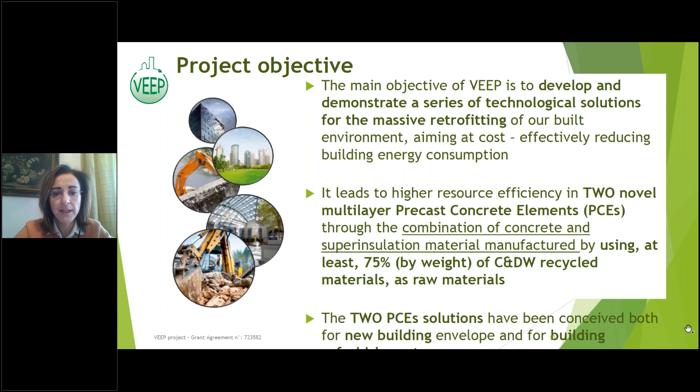The VEEP concept follows the circular value chain for construction and demolition waste recovery and exploitation. At the beginning, we developed novel technologies for treating CDW. Then novel materials were developed, in particular novel concrete formulations for both normal weight and lightweight concrete, and new aerogel formulations. With those materials, novel products, namely two precast concrete elements, were developed for new and refurbished buildings.

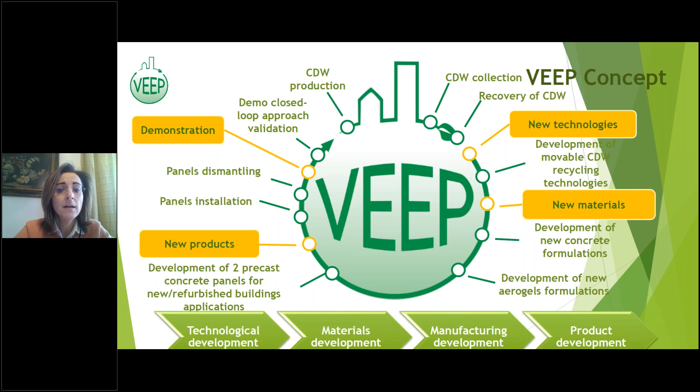The panels were then used for building two different types of mock-ups, installed in two different climate areas in Spain and the Netherlands, to test the behavior of the panels under different climate conditions. A full LCA and LCC approach was adopted to assess the environmental impact of the different PCs. Panel dismantling enabled us to assess the performance of the materials once the PCs had been recycled again.

Now I will go through the details of the novel technologies developed. At the beginning of the project, we designed and developed two systems, the ADR and the HAS, which are capable of treating the coarse and fine fraction of recycled concrete aggregate. Adopting these two technologies, we were able to achieve high quality coarse and fine aggregates.

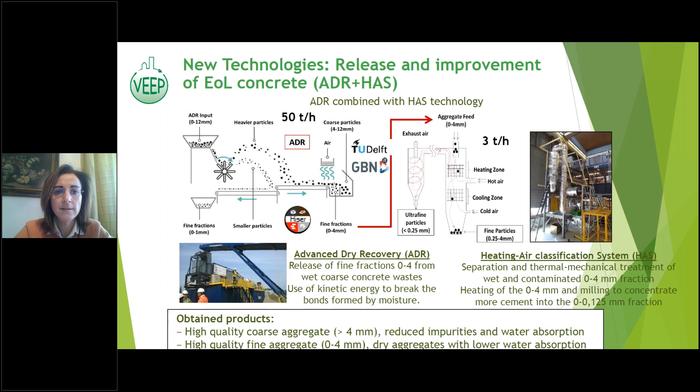In terms of technologies, we also developed a pilot plant with a capacity of 100 liters per day for producing a green aerogel. The green aerogel is characterized by very low thermal conductivity and hydrophobic properties, but with a cost reduction of more than 40% compared to the state-of-the-art aerogel.

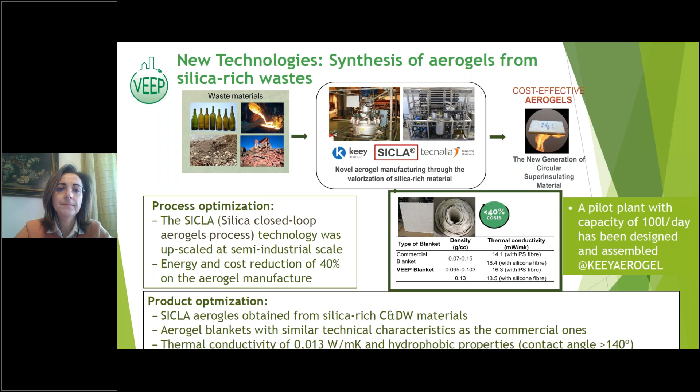Novel materials were also developed, in particular eco-cement and eco-concrete. The eco-cement was produced with 5% of ultra-fine recycled particles from concrete waste, and new eco-concretes, normal weight and lightweight, were produced with more than 75% by weight of recycled material. These materials were characterized by very good properties in terms of mechanical properties, thermal properties, and durability.

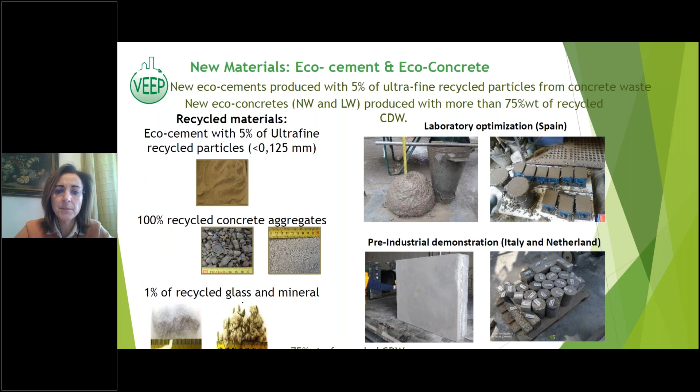The materials were then used for producing the two types of PCs mentioned before, and for the construction of the mock-ups, which are installed in Acciona Demopark in Spain and GBN facilities in the Netherlands, and which are under monitoring.

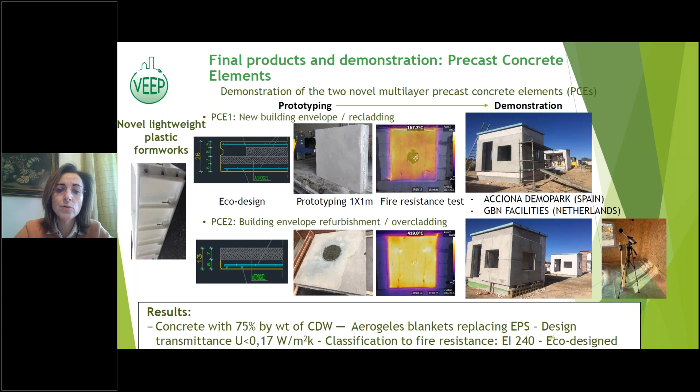It's worth underlining that novel lightweight plastic formworks have also been designed and manufactured in the framework of VEEP, in order to reduce the time for casting the panels.

Finally, we can conclude that even though there are technical barriers to incorporating the finest fraction of recycled concrete in novel concrete, the development of the integrated ADR and HAS movable technology system has demonstrated improvement in the mechanical properties of the cement obtained, which can help overcome such barriers.

Moreover, the positive results about the addition of CDW aggregates, both coarse and fine, can result in better concrete performance. This suggested that we propose an adaptation of existing standards, as mentioned, to allow higher percentages for the use of recycled concrete aggregates in current building practice.

Also, the eco-design of the PCEs can foster their commercialization in the future.

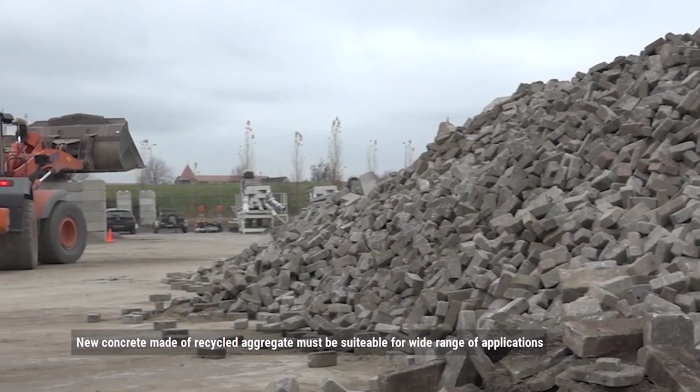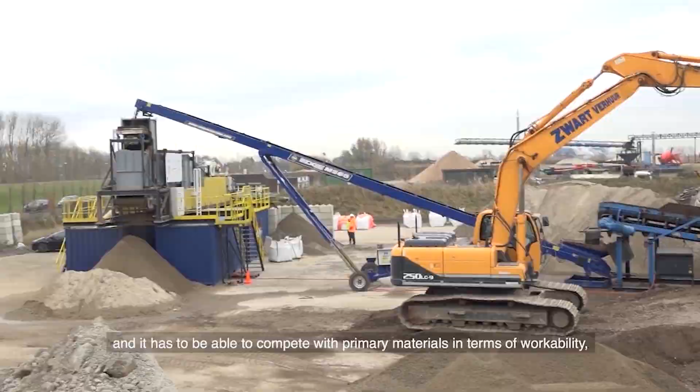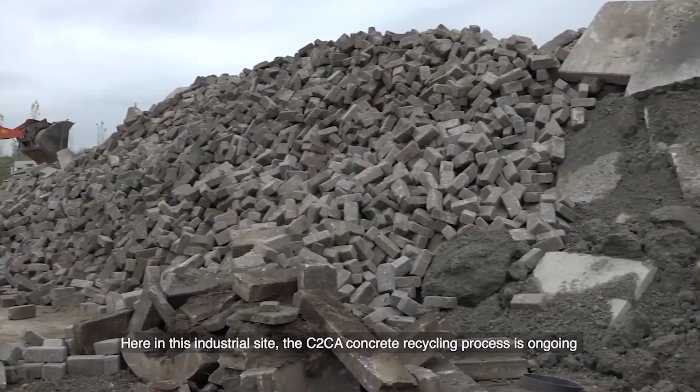New concrete made of recycled aggregate must be suitable for a wide range of applications, and it has to be able to compete with primary materials in terms of workability, compressive strength, and durability. To satisfy these requirements, it is crucial to reduce the amount of fines and contaminants mixed with recycled aggregate. Here in this industrial site, the C2CA concrete recycling process is ongoing to create high-quality recycled aggregate out of high-volume end-of-life concrete streams.

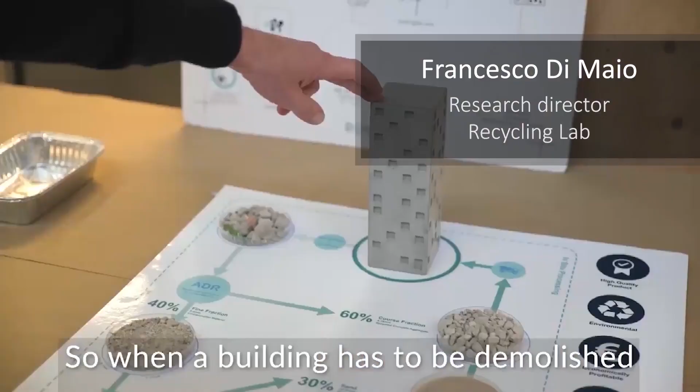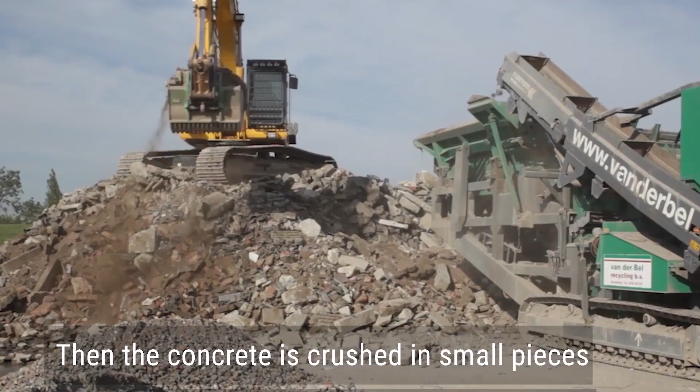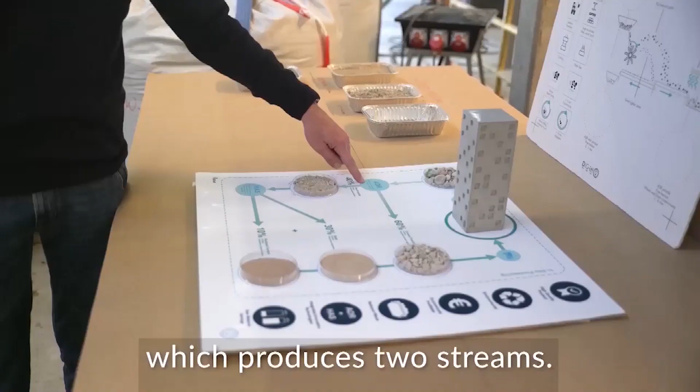So when a building has to be demolished, it is selectively dismantled first, meaning that all materials which can be recycled, such as concrete, wood, metals, and gypsum, are separately collected. Then the concrete is crushed into small pieces and fed to the ADR, a mechanical innovative separation technology which produces two streams: the coarse fraction and the fine fraction.

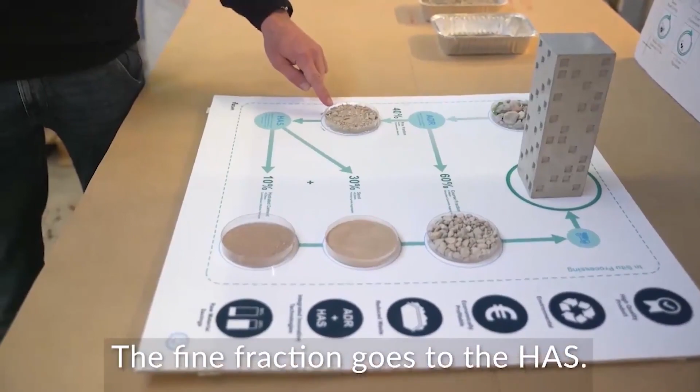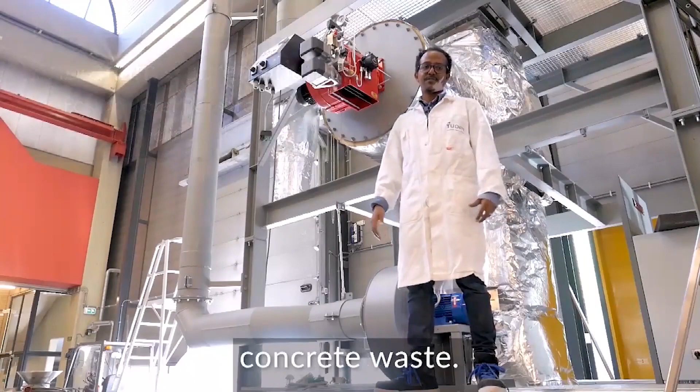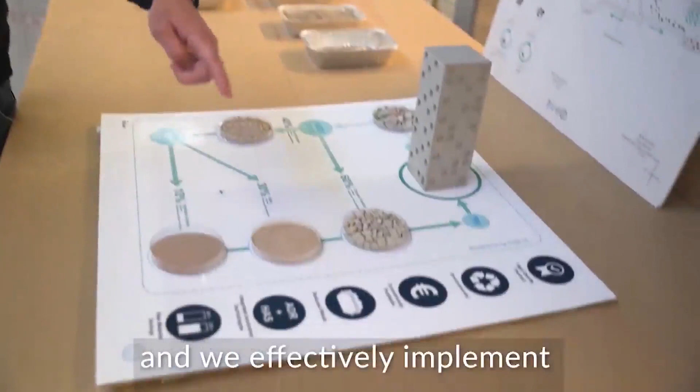The coarse fraction is already very clean and can be reused to make new concrete. The fine fraction goes to the HAS, which stands for Heating Air Classification System. It is used to recycle the fine fraction of concrete waste, producing two streams: sands and minerals. This way, we close the material loop and effectively implement the circular economy in the construction sector.

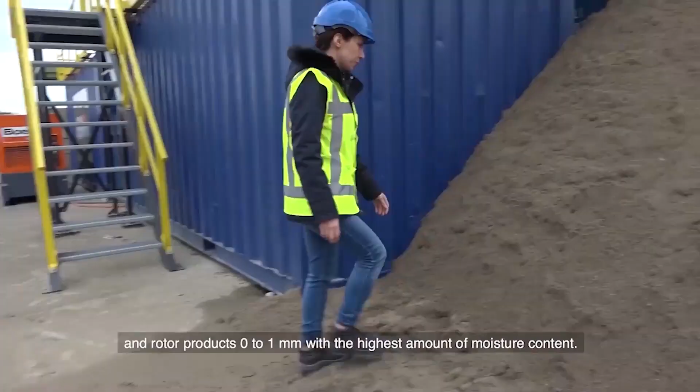ADR delivers three main products: coarse fraction 4 to 12 mm, air knife products 1 to 4 mm, which is mixed with floating material and contaminants, and rotor products 0 to 1 mm with the highest amount of moisture content.

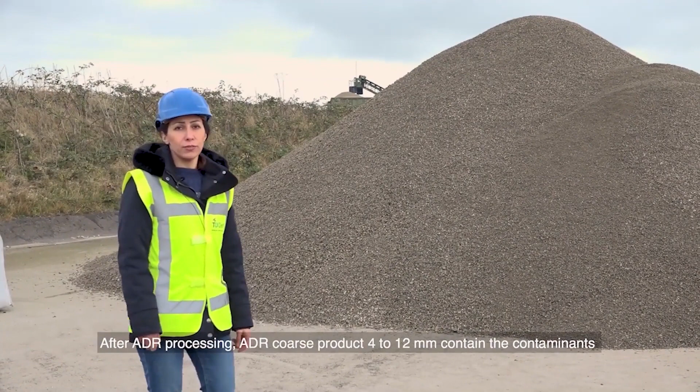After ADR processing, ADR coarse product 4 to 12 mm contains contaminants and floating level less than 0.2 cubic centimeter per kilogram, and the amount of water absorption is between 4 to 5%. So this material is qualified enough to be sent to the concrete production next door.

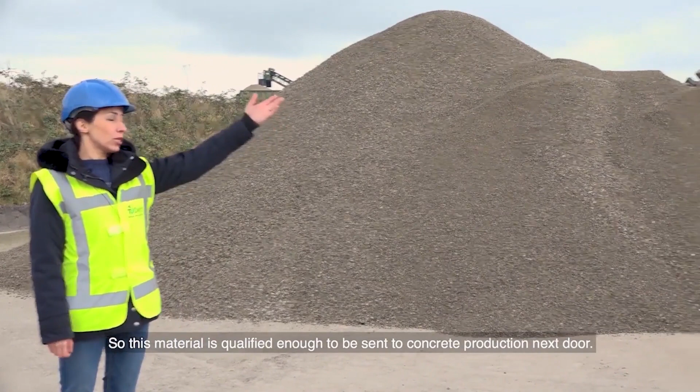I would like to invite now Professor Di Maio, Research Director of the Resources and Recycling Lab at Delft University of Technology. Please, Francesco, turn your camera on. Professor Di Maio is currently involved in projects aiming at developing effective and economically feasible technologies and methodologies that produce high-quality raw materials from end-of-life products. The goal is not to find ways to dump recycled materials into new or existing products, but to displace virgin raw materials. Francesco, please tell us, what are the main advantages of this combined ADR plus HAS system compared to the other recycling solutions today present in the market?

Hi, Alessio. Thank you, and welcome to everybody. I see some strange noise here. Sorry, the main advantage of this technology is that it can sort materials, it can process materials when it is in the wet state. Sorry, Alessio, I have a very big noise. Do you have the same? Yes, we have a big echo. No, I don't have it on my mic. I'm sorry, these kind of things sometimes happen with these new technologies. Maybe while Francesco tries to solve this issue, we can move to the next. We can.

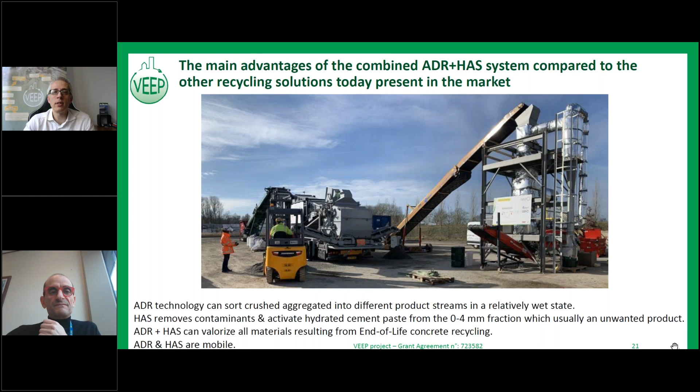And let's say from 1 ton of concrete and demolition waste, what are the outputs in terms of coarse, fines, and ultrafine particles? Roughly speaking, if you have 1 ton feeding into the system, the ADR separates this in the feed into 60% coarse aggregates and 40% fines. The 60% is very clean coarse aggregate, which can be used to make new concrete.

And the 40% going to the heating air classification system is separated into about 30% clean sand and 10% fines. Both materials are very high quality, and they can be used also to make new concrete, or can be used to make filler, or even to be fed to a kiln for cement production.

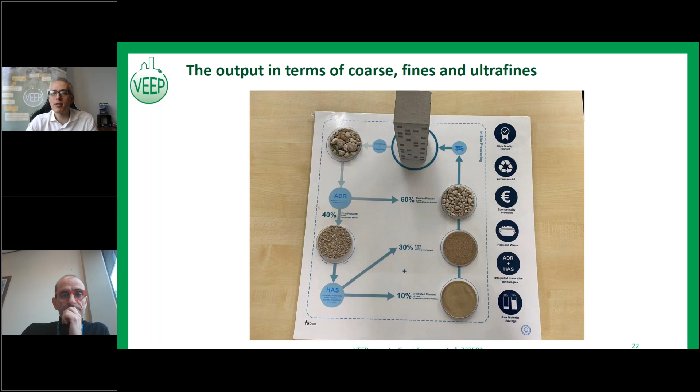Interesting. And now let's also talk a little bit about money. What would be the price of such recycled aggregates, coarse and fine, for potential precast clients? Yes, I mean, basically the quality of the aggregate is so good that if the feed material is of high quality, the outcomes are also of high quality.

And the main feature, I think, is that we can definitely implement circularity, because as you see in this table, we can recover 60% of the value which is fed into the system. This means that it is not just by name that we can make circularity, but we can indeed make circularity in the construction sector. I think this is one of the few ways in which the construction industry can turn into a more sustainable industry. We are very proud of the course of these results.

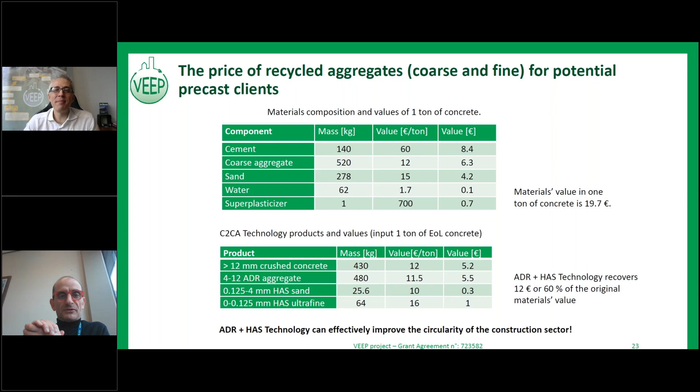To talk about the use of the ADR plus HAS system in concrete, we are with Mr. Jaime Moreno from Tecnalia. Mr. Moreno has a PhD in Material and Processes Engineering from École Centrale de Nantes. He has been working at Tecnalia since 2017 in the field of circular economy in the building sector. His current research interests include circular economy of construction materials, new technologies for the valorization of construction and demolition waste, industrial byproducts, and digital tools for improving the traceability and management of CDW.

Jaime, let's start with the ultrafine particles from the HAS plus ADR system. VEEP demonstrated that it is possible to use them as a partial replacement for ordinary cement. That looks fabulous, but how is it working?

Thank you very much, Alessio, for the introduction. Francesco has just presented the operation of the ADR and HAS technology that allows us to obtain improved recycled aggregate and ultrafine particles with cementitious activity. Those ultrafine particles are improved in order to be used as filler, as Francesco said, or in the production of new cement. But the question is, do these particles have cementing properties? Can we employ them as supplementary cementitious material in new eco-cement? And what are the effects in the new cement matrix?

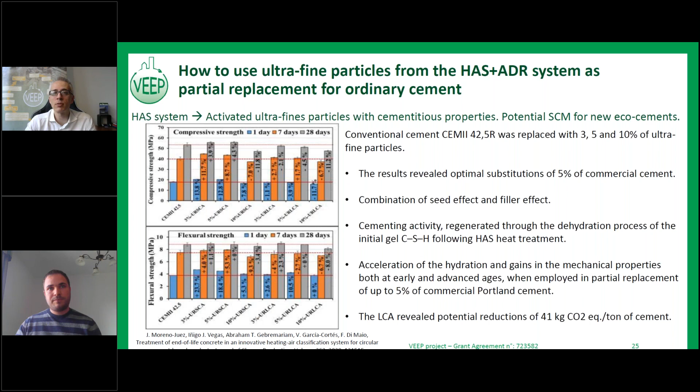In a second stage, we tried to demonstrate the effect of both fine and coarse recycled aggregate in the new eco concrete. For the study, we manufactured different combinations of new concrete, increasing the percentage of recycled aggregate up to 100% of recycled material, and also including the eco-cement studied in the previous stage.

With that, we arrived at a total substitution of 75% by weight of natural material with recycled material. In this case, the result in the new concrete: you can see the compressive strength at different stages of a reference concrete with natural material, a second one with 100% replacement of coarse aggregate, and a third one with 100% of both coarse and fine recycled aggregate replacing natural aggregate.

So here you can see that depending on the age of the test, more or less we are able to maintain the compressive strength, the mechanical performance, and sometimes we even increase the mechanical performance compared to the reference one. Concerning durability, we are able to demonstrate that we have similar durability as the reference concrete.

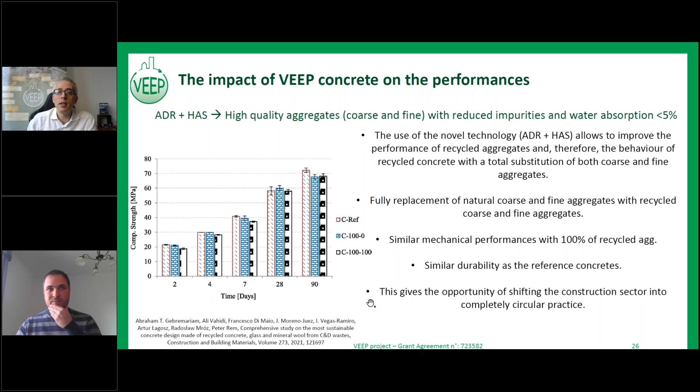Yeah, I'm really impressed indeed. But imagine now that I'm a precast manufacturer and want to use these recycled aggregates for producing my next series of elements. What shall I take into account in practice?

Okay, so we all know that when using recycled material in new fresh concrete, the characteristics, the properties are totally different from a normal traditional concrete. So we have to consider some recommendations during the three steps of the concrete manufacturing.

The first one is during the dosage of the new concrete. We have to keep in mind that we have lower density of the new aggregate, higher humidity, and higher water absorption. So we have to think about having a strict control of the water dosage and the constituent dosage of the new recycled concrete.

In the second stage, we have to consider some differences during the mixing of the fresh concrete. The mixing time that has to be implemented is not the same as a natural one. Normally we have to mix more time, but we have to pay attention that if we mix more, we can reduce the particle size distribution of the recycled aggregate because they are more friable than the natural one. So we have to have strict control of the concrete evolution.

And finally, we have to be careful during the pouring and casting of the fresh concrete. We have slight losses in workability and possible cracking during the curing of the concrete. So we have to try to cast it immediately after mixing, and have strict control of the curing process. This is the main recommendation we can provide after the experience of the VEEP project.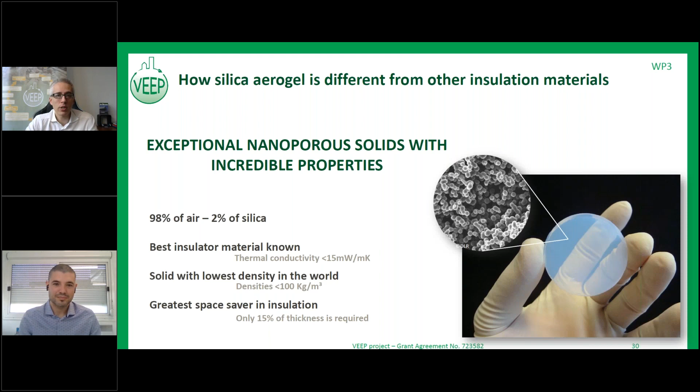In contrast to the standard raw material used for commercial aerogels today, where they use the same product that is used for microelectronics, which is a very expensive raw material, what we have developed with our partner Tecnalia in the project is the use of construction and demolition waste, which has more than 50% silica.

We are extracting the silica and producing the aerogel directly with that, obtaining an aerogel product, what we call a cycler, with a very low carbon footprint because we are using more than 75% by weight of construction and demolition waste. We are able to provide a very efficient, low cost production of the aerogel, obtaining an aerogel with the same quality as any commercial aerogel, with very good thermal properties.

This provides a very nice circular economy model. This system has been recognized by different international awards, and we should highlight that this technology has been labeled as an efficient solution within the Solar Impulse Foundation.

From the video, it appears that cost and fragility are the main obstacles in the use of silica aerogel on a commercial scale. How was VEEP able to overcome either or both of these issues?

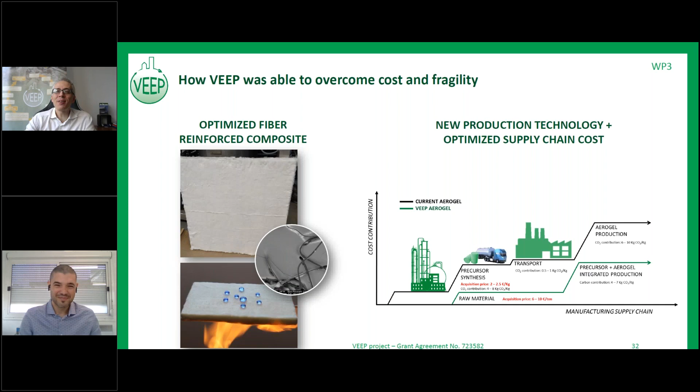Thanks, Francisco, for this very inspiring talk about aerogel. We see that you're really passionate about it. We are currently halfway through the presentation of VEEP. I hope you still enjoy and are getting useful information out of it. Combining concrete and aerogel insulation, partners of the VEEP project designed and produced two precast concrete panels that will be introduced in the following video.

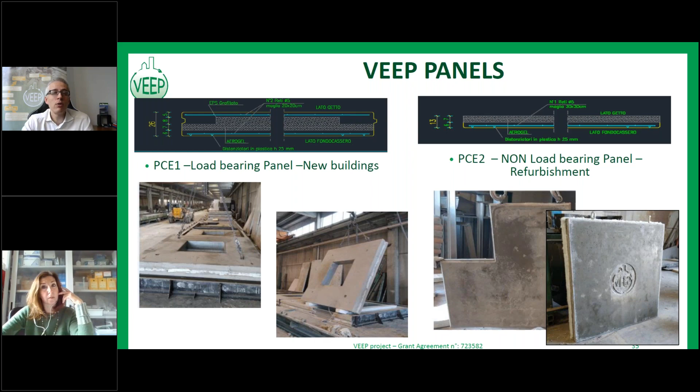Let me tell you a little bit more about this, because besides the panels themselves, these plastic formworks and 3D printed connectors have been developed for VEEP. Do you think they can be used on a daily basis by precast manufacturers?

We know because we have tested it during the process. The formwork preparation and the molding are high time-consuming phases in the overall panel production workflow.

VEEP targeted these phases in an innovative way. We rethink the preparation of formwork using a specific design: flexible and modular innovative plastic formwork with smart engagement and disengagement system through magnets. So the formworks are easily placed, and different types of shapes are composed on the casting table.

This decreases the assembly time to 4 minutes, which is at least a quarter of the normal time used for casting 1 square meter of precast panel.

Then the other innovation we adopted during the casting phase of panels is the adoption of these connectors, that are actually just prototyped for now. So what we did, we designed and modeled the behavior of these innovative connectors.

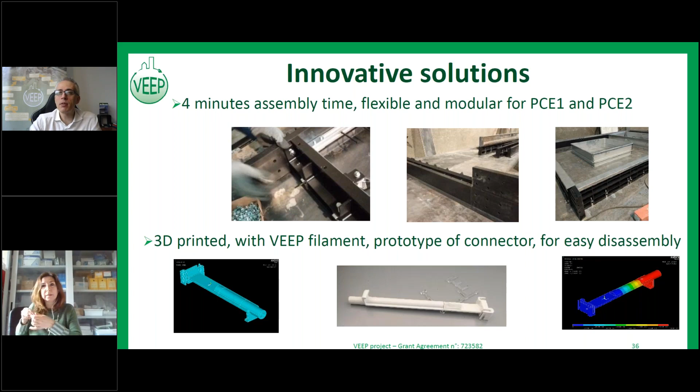Coming back to the panels, do you think they would already be competitive on the market today, or what is needed to make them even more competitive?

With adopting our technology, the panel production is faster, and fewer operations are performed to produce one panel compared to the standard or traditional manufacturing process. Furthermore, the footprint required by the production is highly reduced, and this is also due to the reduced panel weight and the adoption of recycled material.

Furthermore, the thermal efficiency is improved, and this is due to the aerogel. So all these elements concur to the increase of competitiveness of these innovative products.

Last but not least, thanks to the innovative formworks, we are able to avoid the effect that you see in the left picture, where there is the effect called the seepage of concrete through the side of the traditional formwork. As you see in the right picture, using our formworks, this effect is abolished.

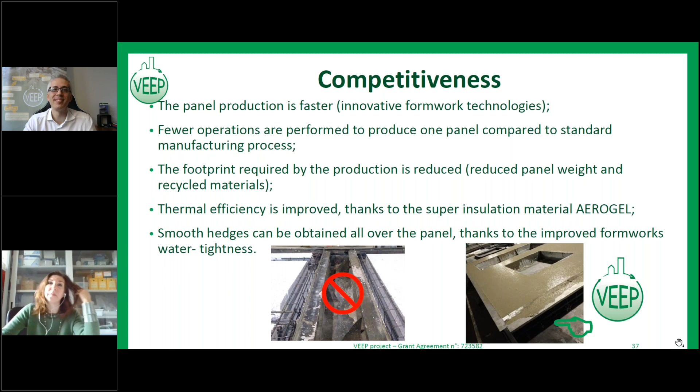Thank you, Georgia, for presenting us the VEEP panels in such a clear manner and short time. As Anna told at the beginning, more information on the project results is available on the VEEP website, www.veep-project.eu. Once manufactured, these panels have gone through thorough on-field testing.

The mock-up is presented in the following video.

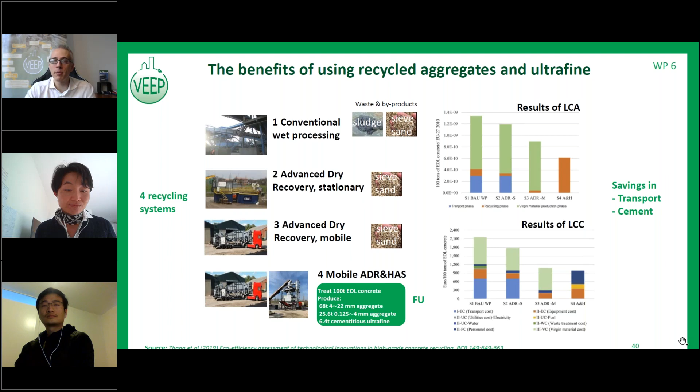Thank you. And now let's go to the panel also from life cycle assessment perspective. Are VEEP panels better than the ordinary ones?

Generally, we say yes, but it largely depends on how much we can really reduce the production emissions and the cost of the aerogel part. My colleague Chunbo will give you more details.

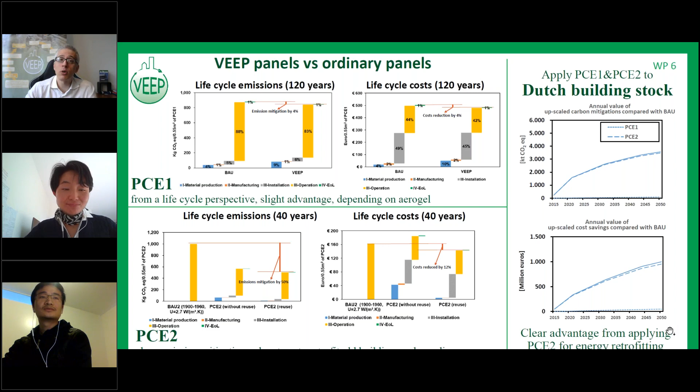Just as we said, we found the key is really to improve the reusability of our PCE panel, because that is PCE2, the majority application. Also, we used the case study in the Netherlands to see there's huge potential out there. And the second is still to reduce the production cost of the aerogel if possible.

If not, then try to optimize and reduce the use of the aerogel part in the panel as much as possible. Chunbo can give you more explanation on this.

Yes, so first, for PCE2, we need to enhance its reusability, and the realization of reusability can further reduce the cost and emissions for production of a new PCE2. According to our estimation, successful reuse can reduce 23% of lifecycle cost and 11% of lifecycle emissions.

And second, for PCE1, if we further optimize the cost effectiveness of the aerogel layer, there will be big economic advantages. The EU regulates that buildings constructed after 2020 should meet the nearly zero energy building requirement. So one possibility could be, based on the requirement of each member state, to adjust the thickness of the aerogel layer for different climate zones.

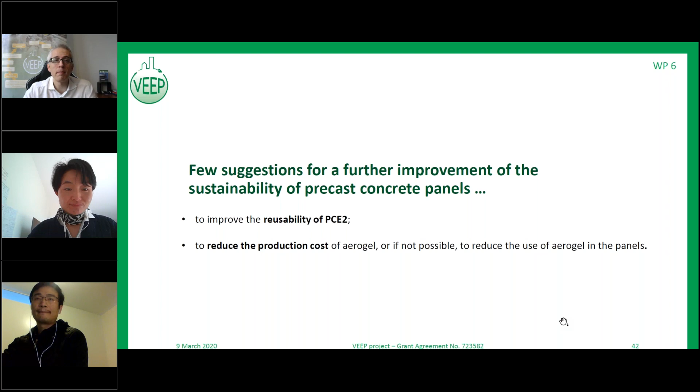We know the importance of sustainability assessment for new products to be successful in a competitive market like construction. So we now come to the end of the VEEP presentation. I would like to thank again all the panelists of this session, because they were able to summarize in less than one hour a project that has been running for more than four years. I also take the occasion to thank all VEEP partners who contributed to the achievements of such a successful project and cannot be with us today.

But please stay with us for the upcoming clustering and Q&A sessions before the final wrap-up by the VEEP project coordinator. The first clustering project is ICEBERG and will be presented by Mr. David Garcia Esteves from Tecnalia.

Mr. Garcia is a senior researcher with a PhD in materials engineering. He has been working at Tecnalia, the largest private research center in Spain, since 2006. His current research interest is in the field of eco-innovative materials and services in building and civil applications, and he has previously coordinated projects like IRCOW under the 7th Framework Programme and HISER under Horizon 2020. Nowadays he is project manager of ICEBERG. David, the floor is yours.

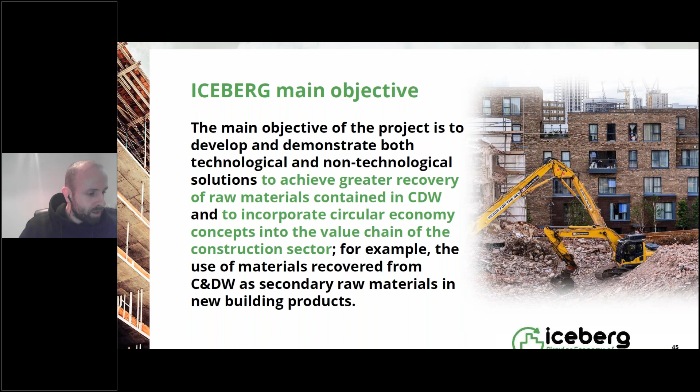This project takes into account the results of previous European and national projects, and the idea is to upscale and integrate some of the existing developments and technologies, taking into account the different stages in the life of buildings. This is the concept of the ICEBERG project. As you can see, we decided to start at the pre-demolition stage. It doesn't matter at what point we start, because at the end we consider the buildings as a circular process, but just by methodology we decided to start at pre-demolition.

In all those different stages we want to make additional contributions. For example, in the first one we want to develop new digital solutions for the quantification and planning of demolition activities. Later, we will develop technologies for the automatic identification, sorting, recycling and purification of the different materials. In this project, we are dealing with the main materials included in buildings: concrete, ceramics, gypsum, wood, and also insulating foams.

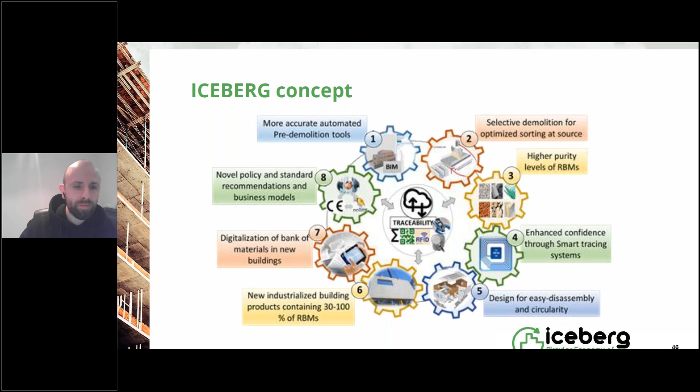Here you can see that the innovations of the project can be clustered into 3 groups. The first are the smart services and software related to pre-demolition activities and traceability issues. Part of these innovations will be new software to support the demolition process and decision making, and also a traceability platform including information related to waste identification, quality control, and the different actors involved in the collection and purification of those waste streams.

In the second group, there will be room for new and upscaled advanced sorting and recycling technologies. For example, we are planning to develop a mobile automatic sorting line with a hyperspectral imaging sensor. With this equipment, we plan to automatically separate ceramics from concrete, or remove gypsum from ceramics and concrete, and purify the different materials before the later recycling stages.

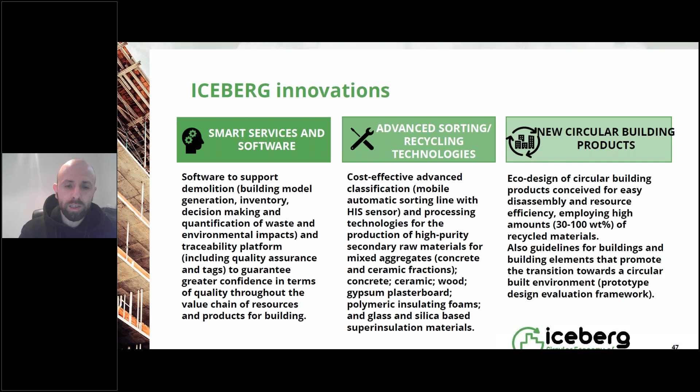The activity will not stop at lab or facility scale. All the activities will later, in the third year of the project, be demonstrated at a very high TRL in 6 case studies in 6 different locations in Europe. In each of those case studies, there will be different materials and different solutions considered, but they will follow the same process and contain the same activities.

In all of them, there will be activities relating to the pre-demolition audit and preliminary study of the expected waste in the building. There will be a plan and a demolition project using selective demolition techniques. There will be waste processing and the use of that waste for recycling and obtaining new materials. With all those recovered materials, we plan to manufacture new elements that will again be installed in representative building spaces.

In all those steps, we will use the new digital traceability service to include information about the different options during demolition, material recycling, etc., and use that information to quantify the environmental impacts, the cost, and the source of the different materials, in order to increase the confidence of final users in those recovery solutions.

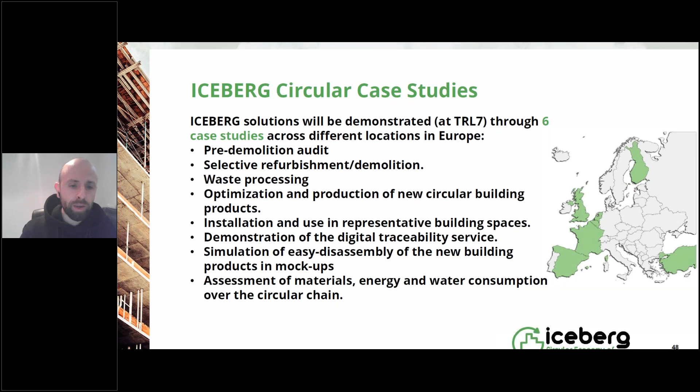Well, this must be a very short presentation. Of course, there are other activities, other transversal activities, like those related with the analysis of standards, policies, and social awareness.

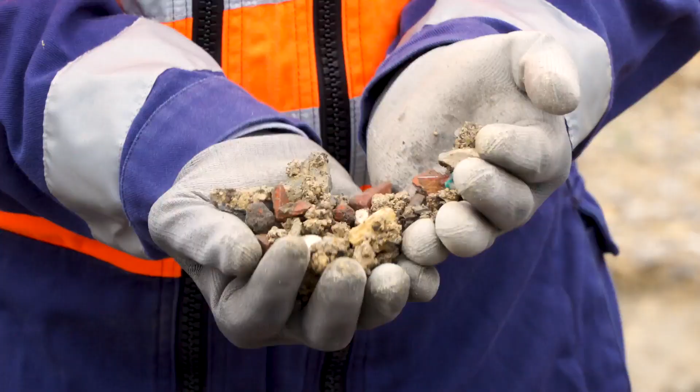SeRaMCo provides solutions to recycle and reuse construction and demolition materials in new building structures. SeRaMCo contributes to reduce the ecological footprint of the construction industry.

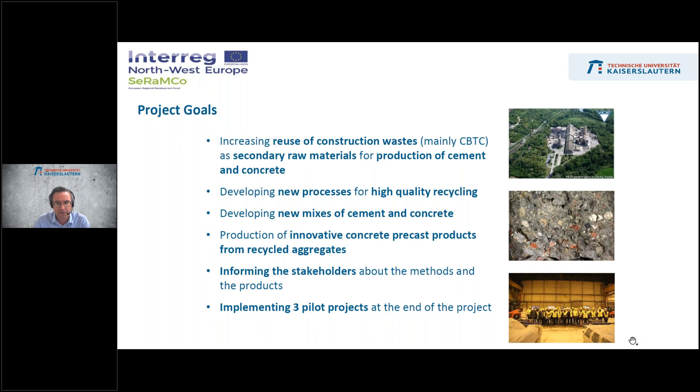We do this in order to produce innovative concrete precast products from these recycled materials. Of course, due to market reasons, we want to inform stakeholders, probably also as doing right now, and showcase this with 3 pilot projects at the end of the project.

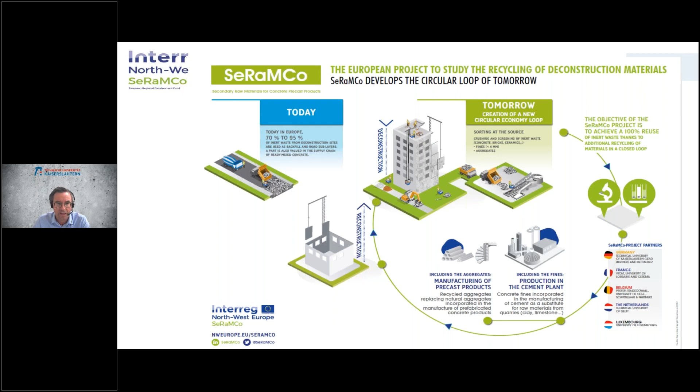The next slide shows you the overall project. The blue box shows what happens today. Most construction demolition waste ends up under road construction. We are thinking about the green tomorrow. So we want to deconstruct buildings, have the sorting process as high quality, and use the fine grades for the cement production and the coarse grades for the concrete production as aggregate to rebuild buildings. At the right side, you see the project members sorted to countries. And how do we do that? Next slide, please.

Due to the short time, I'll just focus on the end products. As you know, the project is now finished. Of course, it was a long way running, and I promise to show you links to find all the information of the project. How did we do this with the precast products? We used the ingenuity of young students.

The next slide shows some examples of the products. Of course, we always thought about mass production, and on the other hand, fancy products to change the image of recycled products. The left one is a precast wall. As you see, you can use insulation inside, or you can also pour in concrete as a massive construction.

In the middle, you see a gabion wall, where we measured, at the lower picture, at Tradecowall, one of our project partners, how we could cool down the air due to vaporization. On the right side, you see pavement, which is also possible with recycled products.

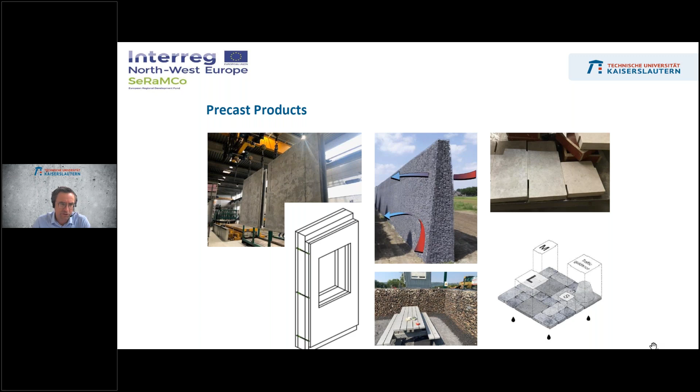The next slide shows an energy bench. This is one of the products to turn the image of recycled aggregates. You see here the bench in our lab in Kaiserslautern. It's made of recycled concrete and furthermore uses the mass and temperature difference via a Peltier element, giving lighting, as you see in the visualization down picture, or letting you charge your cell phone.

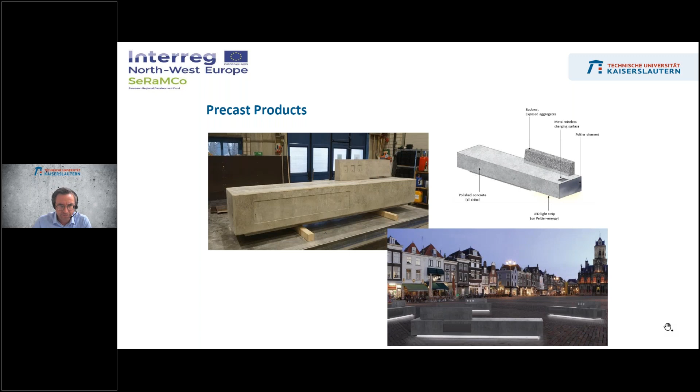Furthermore, we also have pilot projects. There are 3 projects in the overview. At the top you see Seraing in Belgium. Then we see Thionville in France and Pirmasens in Germany. I'll just focus on 2 of them.

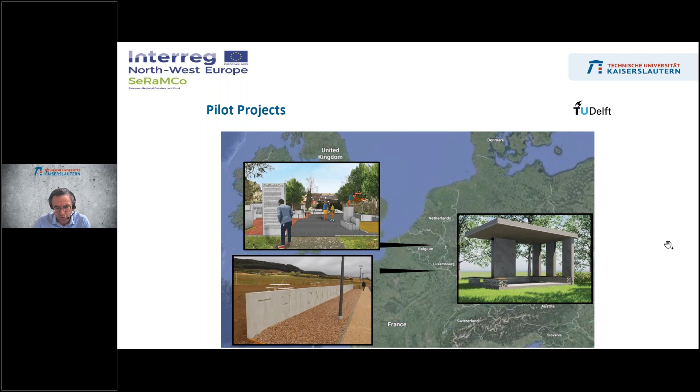The next slide shows the pilot project Thionville Porte de France in France. Here we have showcased the L-wall, as you see, with the letters inside of it, made out of 100% recycled aggregates from our precast partners, which shows really great quality. So L-walls are really no problem to do with recycled materials.

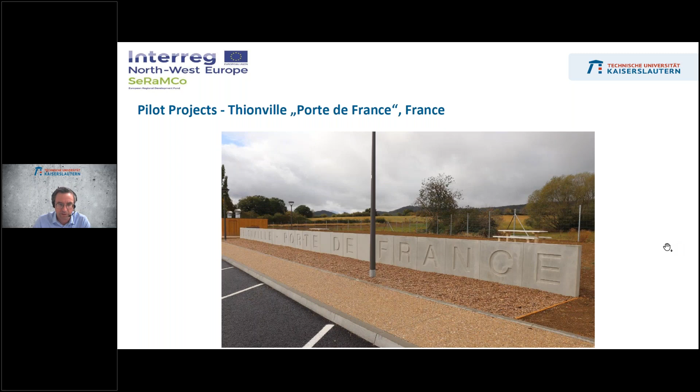The next pilot I want to show, this picture is just from 2 weeks ago - we finished the pilot pavilion in Pirmasens, Germany. It's about 40 square meters, made out of various products from SeRaMCo. You see the walls as prefab elements, filled in situ with recycled concrete, and you see the roof construction, which is also designed for purpose. Both are made out of recycled materials.

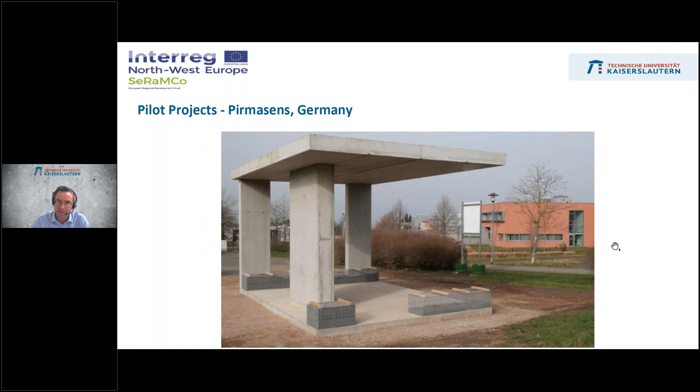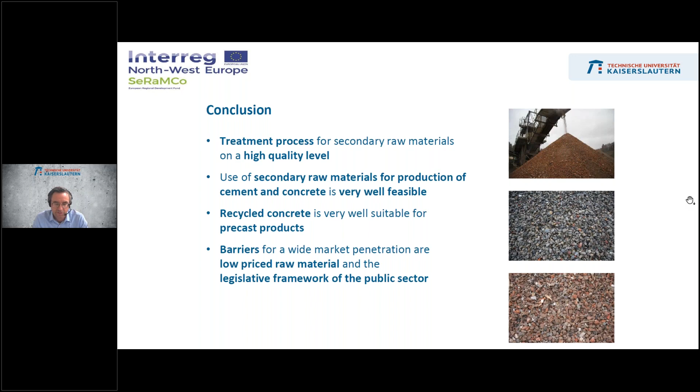We hope it will give benefit to the city of Pirmasens. Let me come to the conclusion. What are our conclusions after 3.5 years? I'm very sure treatment processes for secondary raw materials are already at a high level. The use of secondary raw materials for production of cement and concrete is very well feasible, and even more, they are feasible for precast products. But on the downside, the barriers for wide market penetration are low-priced raw materials and the legislative framework of the public sector. This has to change to improve usage.

On the next slide, you'll find all of the information about the project. We have made 7 videos, like the one you've seen. This one was done for a RegioStars Award, where we were happy to be voted as a finalist. You have all the presentations from our final conference, also done in January as a web meeting, and the conference paper. Furthermore, you see the overall project partners on the right side of the slide and my contact details. Thanks a lot for your interest in my project, and I'm happy if you contact me for information. Thank you.